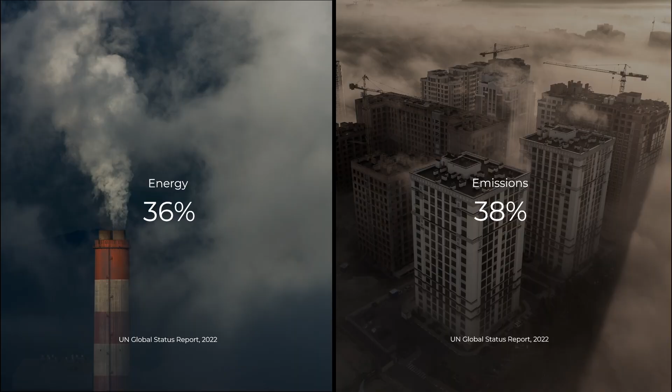And the reason why I'm saying this is because today the building and construction industry is responsible for 40% of the CO2 emissions worldwide every year. To put things in perspective, transportation, flights, cars, trains, all of this is 25%. So it is something to talk about.

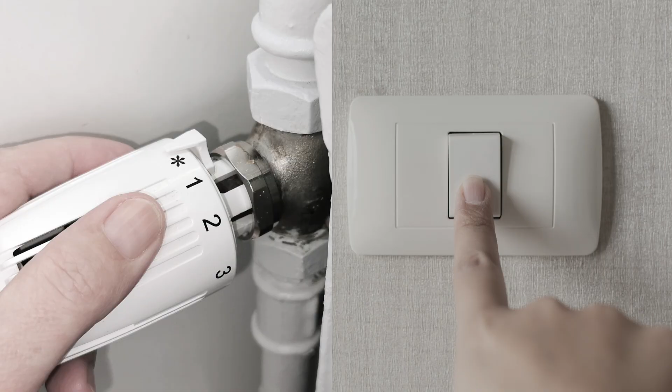And maybe the first thing that popped in your head was, okay, we just have to turn off the heating, we should reduce the electricity consumption, and so on. Yes, we should all do this, don't get me wrong, but this is not going to help. I'm here to disappoint you. And the reason why it's not going to help is because we have to think about the problem in time.

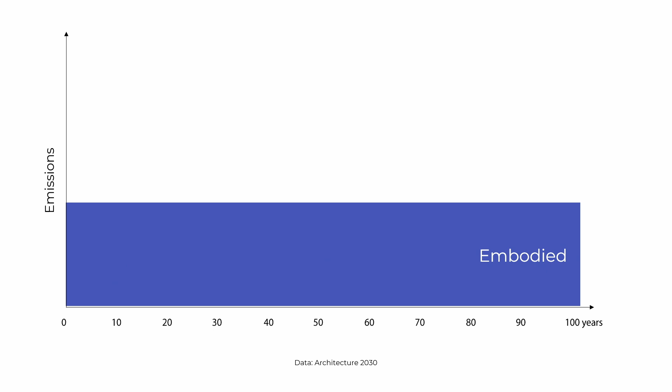Whenever we build a building, maybe we are not aware, but we are already producing a lot of CO2 emissions. This is what happens when you actually create a structure. You lock in a lot of CO2 emissions. When you start using the structure, then you start doing all these emissions related to heating, cooling, and electricity. We can reduce the operational part, but we cannot do anything about the embodied part. If we make a mistake today, that is going to be locked in there forever.

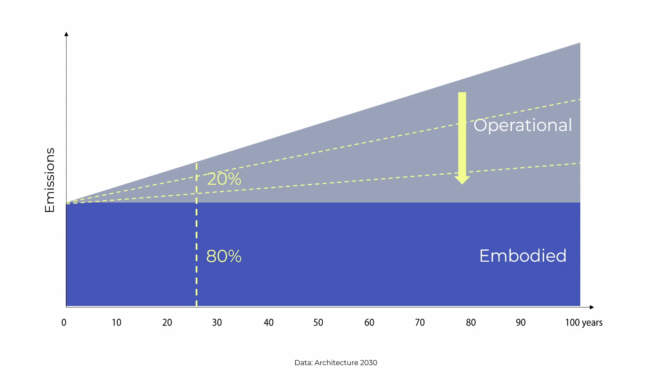And on top of that, our problem is not in 100 years. We have to find a solution in the next 20, 25 years. And so most of it is going to be because of the building, not because of the use of the building. On top of that, to make things even worse, just because I like to give bad news, this is not the only problem. This is just the tip of the iceberg.

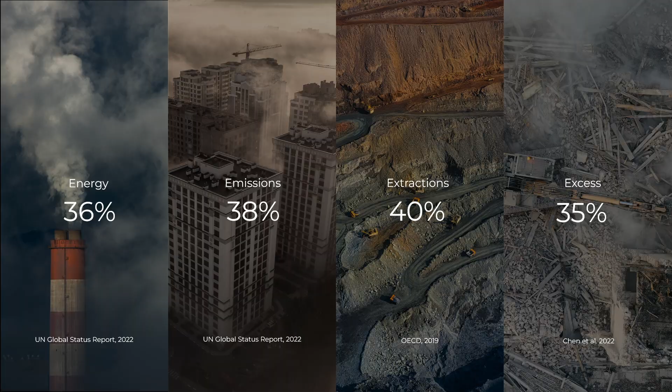We conveniently always talk about CO2 emissions, but there are other problems, and the construction industry is largely responsible for this. We are taking a lot of materials from the planet, and we are not using them very well because we build buildings that are not very well done, and they don't last long enough, so we have to demolish them and build them again. And this is not going to get any better, more bad news.

So it's clear to me, and I hope now it's clear also to you, that we cannot do what we are doing now. We need to change the way in which we design and build structures, buildings. This is a solution. I see the despair in your faces, but I put it here not because I want to scare you, but actually because I want to motivate you. Because this is actually a very simple equation.

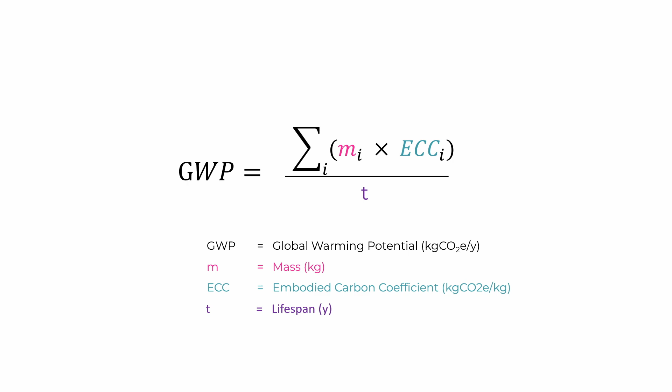What this equation is telling us is that the global warming potential, so how bad our buildings are, is only a function of three things. How much material we're using, how good or bad this material is, and very importantly, time. If we build good structures that last longer, we produce less harm. This is a nicer version of that equation.

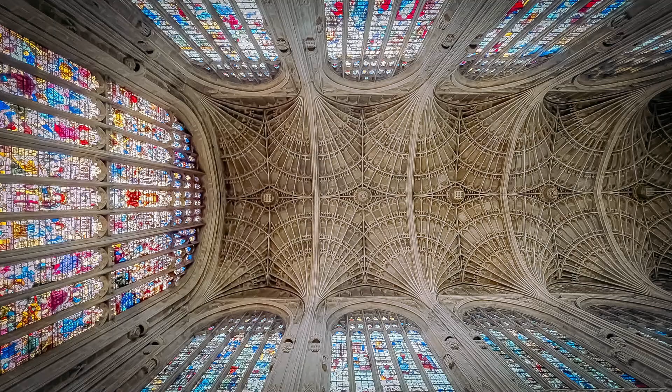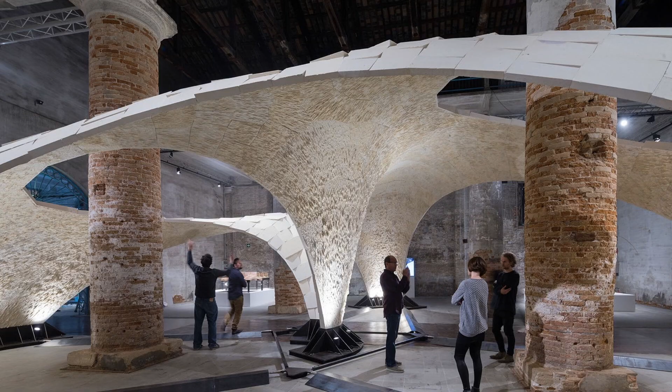Most of these structures were actually made from parts of other buildings that were taken from the surroundings. These structures are undoubtedly beautiful, but also very, very efficient. Proportionally, one of those shells is as thin as an eggshell. Crazy, huh? These guys didn't have computers, they didn't have fancy mathematical models, and yet they could do things like this. Now we have computers, now we have fancy mathematical models, so we can do even better.

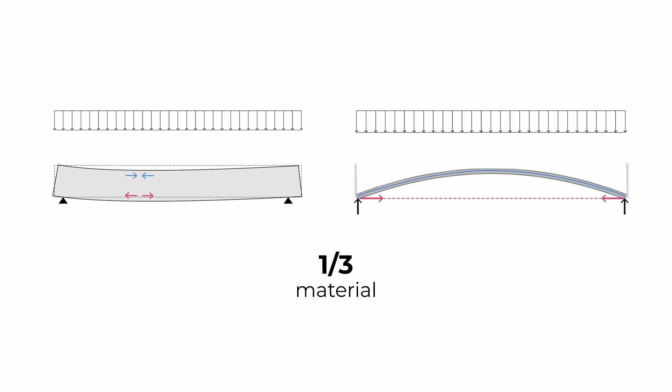If we apply these principles to modern construction, we can already save 2/3 of the materials that are surrounding us in our buildings. 2/3. But now, which materials should we use? And now it's the second poll of the day. How many of you believe that this is true?

Wow, this is a very educated... Okay, 50-50. Also because this is actually 50% true and 50% wrong. Because concrete is actually very polluting today. It's responsible for about 10% of CO2 emissions today, cement production.

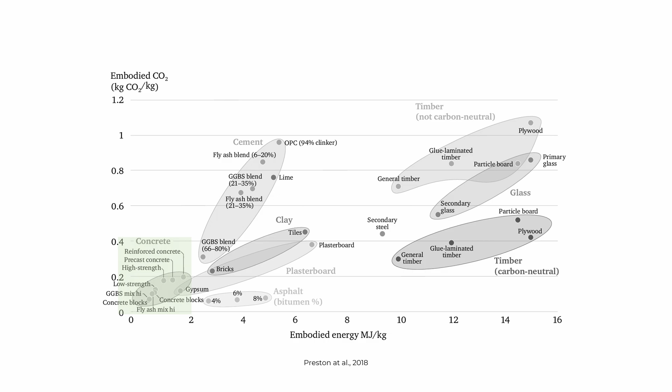But the problem is not concrete itself. Concrete is a very sustainable material per se; as a material, it has one of the lowest embodied emission and embodied energy coefficients of all construction materials. The problem with concrete is not the material, it's the use that we make of it. It's the second most used substance in the world, after water.

And the reason why is that it's actually very versatile, it's very useful, it can be used everywhere. But we've grown to use it everywhere, even where it's not needed. Today, we can do better. We can make the production of cement better. We can reduce the emissions related to the production, but we can also reduce how much cement we put in our structures. And again, we can save 2/3 of the emissions that we are producing today.

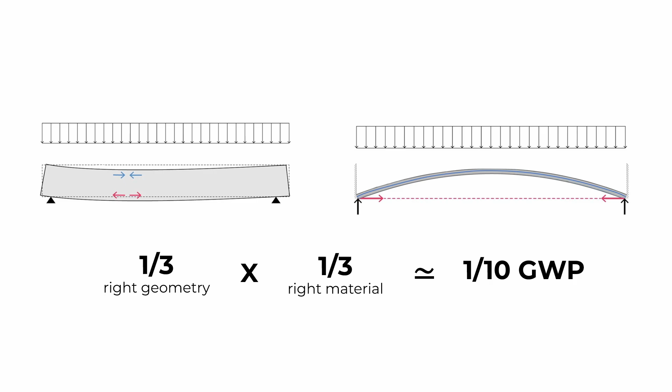So when you combine these two things that I described before, when you combine the good geometry with the good material, then you can, allow me the approximation, have a fraction of the global warming potential of a structure. However, these were drawings. We have to actually solve the problem today on a large scale. So we need to understand if we can apply these things in these buildings.

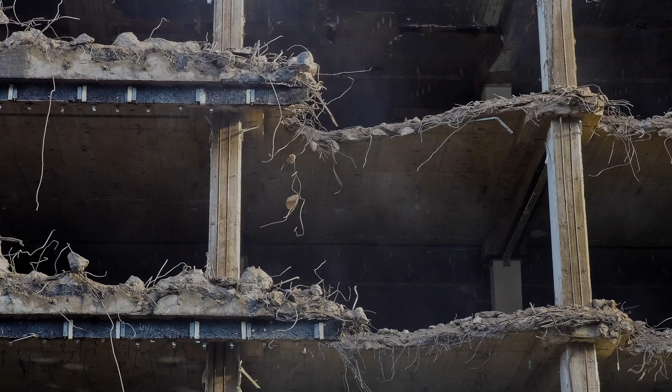And the reason why they're so polluting, they're so massive, is because we build them like this. We put a lot of material, we mix materials together. This thing that you see, it's impossible to reuse and very, very, very hard to recycle. But so we learned something today. We learned that we can save mass, we can use better materials.

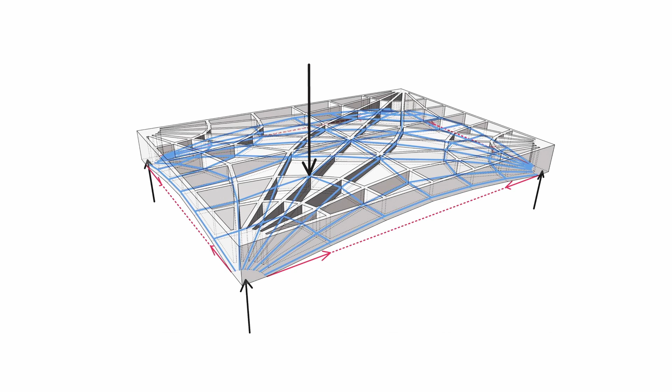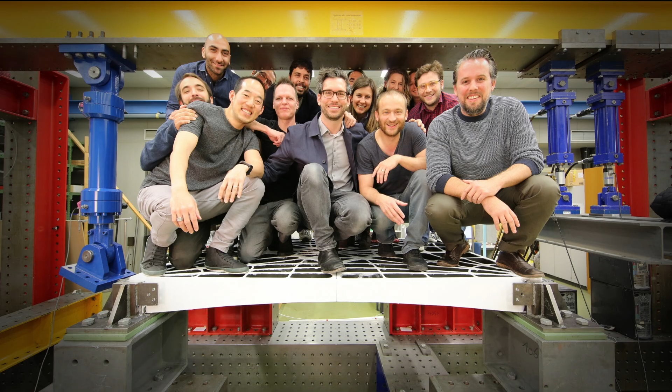If we do a leap of faith that this works also in 3 dimensions, we have something that is a little bit more complex, but at the end of the day, it's the same principle. It's the same thing that was behind the Gothic cathedral. And this is what we call a funicular floor. We tested this thing extensively over 10 years of research in Zurich. We put our lives at risk. This is 1 ton of nerds happily demonstrating that this thing works.

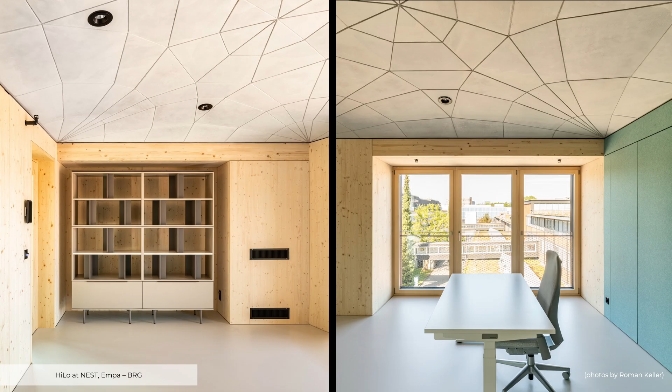And then we finally built a real building. It's a bit of a crazy building, but it's a real building. It's a real office. In this building, we put 2 of these floors, about 20 square meters each. And these are the floors. And these floors show us that with good structural geometry, we can do something that is beautiful, it's elegant, but it's also very efficient. 50% less concrete, 80% less steel, 70% less emissions.

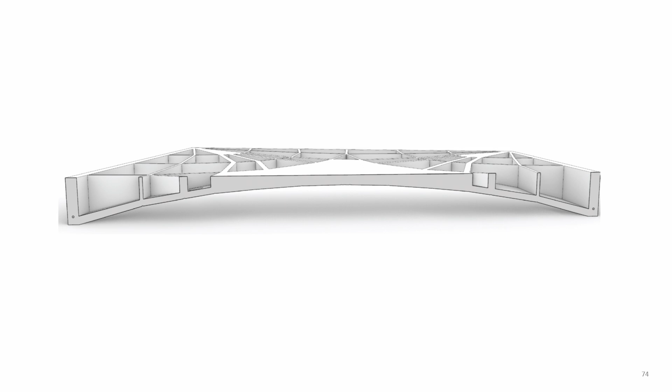Of course, the geometry, of course, the vault, but I want to catch your attention on one thing, that little dot that is there. That little thing is the only reinforcement bar in one of these concrete floors. And so you see the difference between what we can do and what we are doing right now.

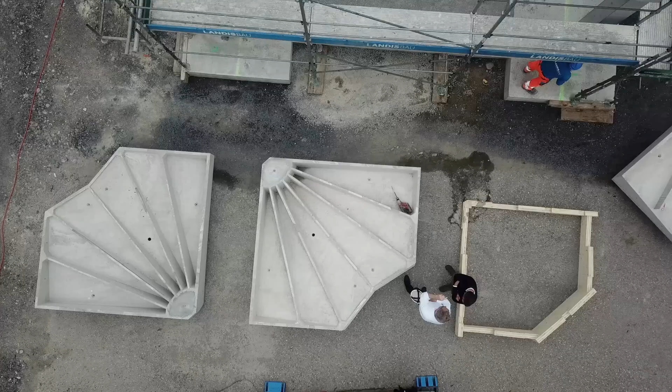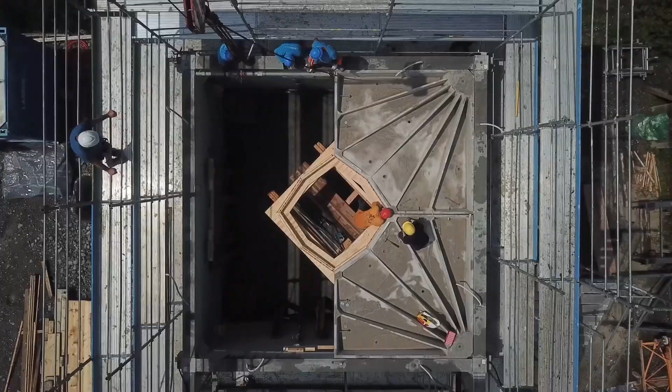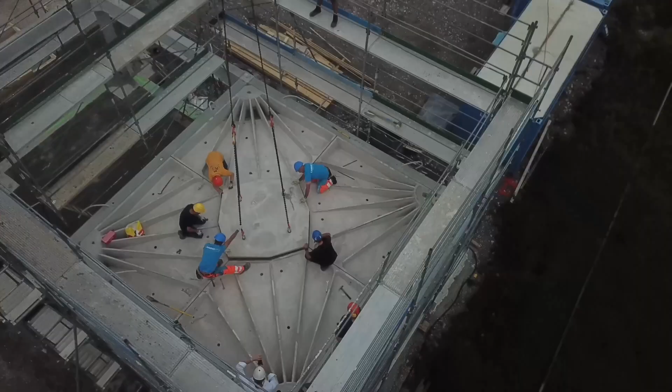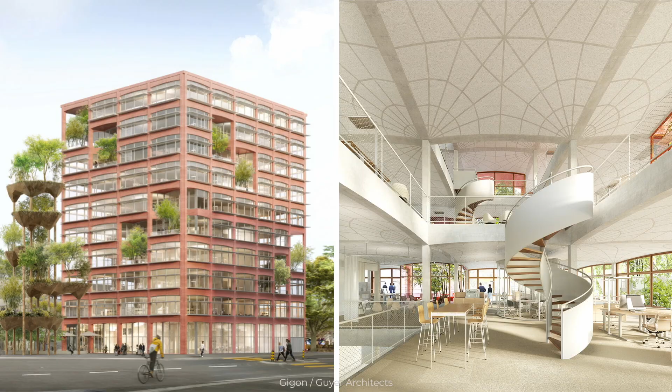And we can do even better, because we removed all this steel from inside of these structures, so we can start cutting them up and produce them in factories where everything is more efficient. We can deliver them on site, put them together very easily, because again, there is nothing to connect. Everything is in compression. Put the keystone, the Schlussstein, the only German word that I know, and then you have something that is stable and safe and ready to take any load for which it was designed. This was the first of 180 similar floors that we will build for this tower next year.

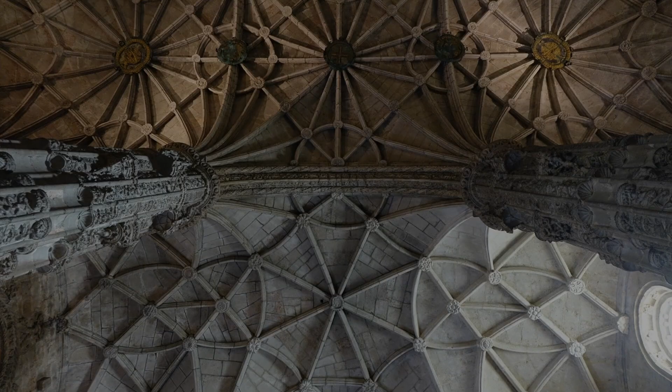These buildings show us that it's possible already today to have better solutions, to apply them at large scale, when there is a combination of researchers that bring new ideas, practitioners, engineers that embrace them, and clients that want to change the status quo. What I hope I showed you today is that with the right geometry, with the right material, learning from the past, we can turn the most polluting material in the world into a beautiful and sustainable structure.